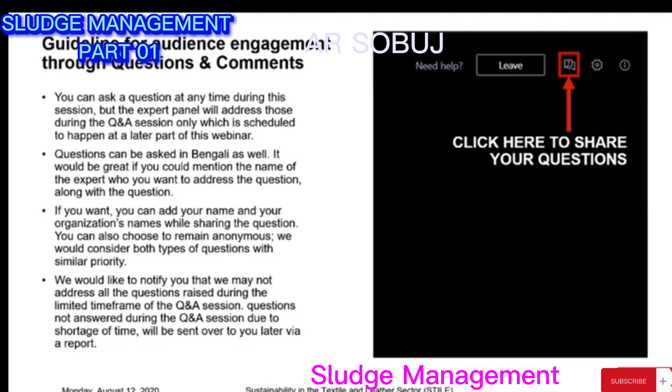I'm reminding you again, your comments and questions options are still open. With that note, let me move on. I would like to invite Dr. Emmanuel Varghese to join in and share his insights on the management and optimization of sludge and also improvements in ETP for the textile sector. Dr. Emmanuel, over to you. Thank you. Thank you, Muntasir. I am audible now. Yeah. Thank you so much, and this much encouraging participation is also a great thing. And let us move on to the presentation straight away. Next slide, please.

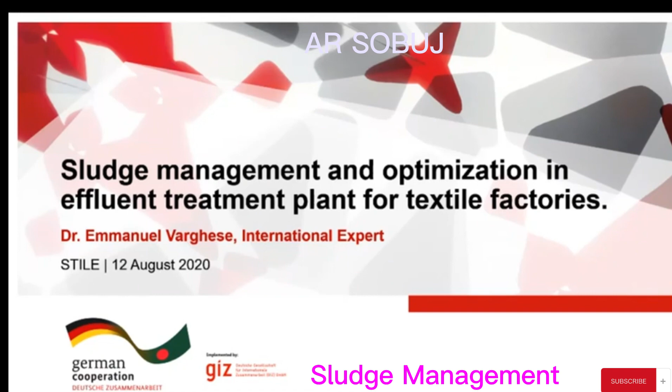Now, Dr. Abbas has presented very detailed and very deep into the source of the sludge which comes into the effluent. And he also explained very nicely what can be there and what actually should not be there, but is still there. So now let us move on to the area where the sludge is actually generated, that is ETP. When we talk about sludge management, we categorize it as 6 areas, where the first step we need to manage the sludge is sludge thickening, where the purpose is to reduce the liquid sludge volume, and there are gravity thickeners as well as mechanical thickeners for that.

And then there is sludge dewatering, how to make it into a solid material. And before we actually send it for disposal, it would be nice if we can reduce the quantity of sludge or make it more inorganic so that the quantity can be less. Also, the sludge is more inert. And the sludge disposal and utilization, often these two are combined, but the disposal is the most important part, which is actually handled by my colleague, Dr. Shoaib. So next slide, please.

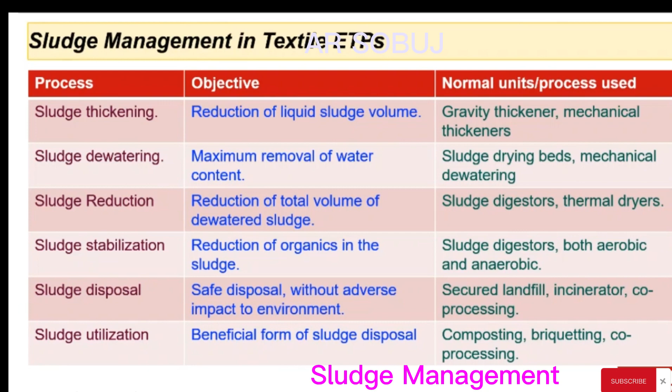So when we talk about sludge thickening, thickening is nothing but just making the sludge thick. That means it is less watery, but with more solids content. It is more useful for the biological ETPs because the biological ETP wasted sludge is actually more watery than the combined ETP with the primary treatment. Now, if you look at the common thickening process, it has gravity thickening as a normal thickener existing in ETPs, or it can be also mechanical thickening.

Gravity thickening is a plain sedimentation, whereas mechanical thickening uses equipment, like you could see in the picture on the right side. It can be a rotary drum, which has a perforated drum for separation of solids, or it can be a centrifuge, which you can see in the last picture, which uses a centrifugal action. And there are also less common but more effective mechanical thickening options like flotation, gravity belt thickening, dynamic screens, etc. Next slide, please.

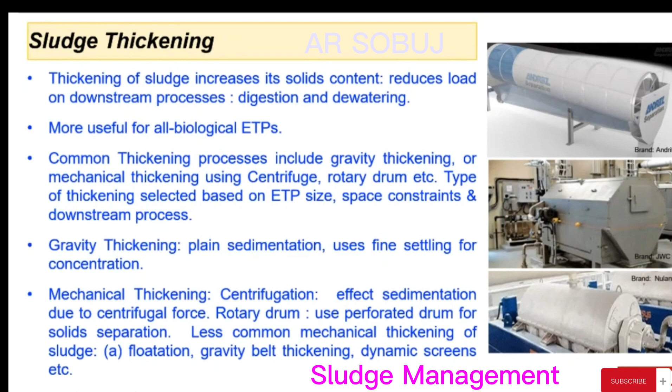Now, if you look at the gravity thickener, some of you must be familiar with it because many ETPs in Bangladesh have this unit. It is similar to a primary clarifier, except that the bottom portion of the tank is much steeper. It has more slope so that even the thick sludge can come into the center. And it has a unit called picket fence. The picket fence is like a fence, which will move around and make sure that the sludge doesn't get clogged.

The process is very simple. You know, in a normal settling tank, we keep it for something like 1 or 2 hours, or sometimes 3 hours. But that is not enough to make the settling complete.

So in the thickener, we give about 20 to 24 hours, so that the thickening will be complete and we get a very thick sludge in the bottom. The key design parameter is how much solids we are sending into the unit: surface load. For biological treatment, the surface load is normally 1 kilogram per meter square per hour, and for combined ETP it can be 2 to 2.5 kilogram per meter square per hour.

And we have to note that the thickener only increases the sludge solids percentage. It doesn't reduce the quantity of total sludge we are handling. In effect, it only makes it simpler for the subsequent sludge dewatering unit. For example, if you don't do a thickener in an ETP, all biological treatment gives you only 1% sludge. The combined ETP may give you about 3% sludge. So if you go for a dewatering unit based on this quantity, it tends to become too big.

So to make it smaller, we can always use the thickener, so that it can also make the dewatering more efficient. The disadvantage is it is less efficient compared to the mechanical thickeners, a little bit of space is needed, and sometimes there could be some smell. Normally it is not there for textile effluent, but it could also be there if you don't take out the sludge periodically. Next slide, please.

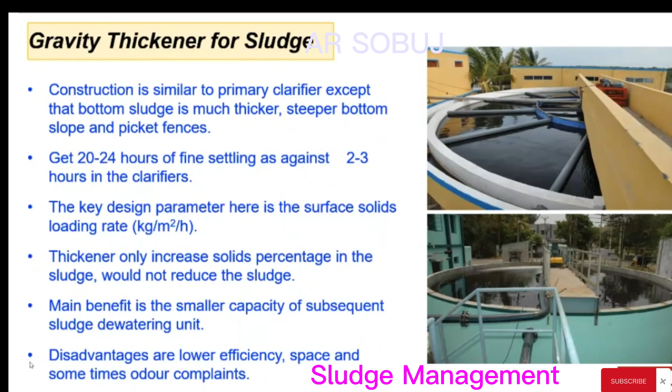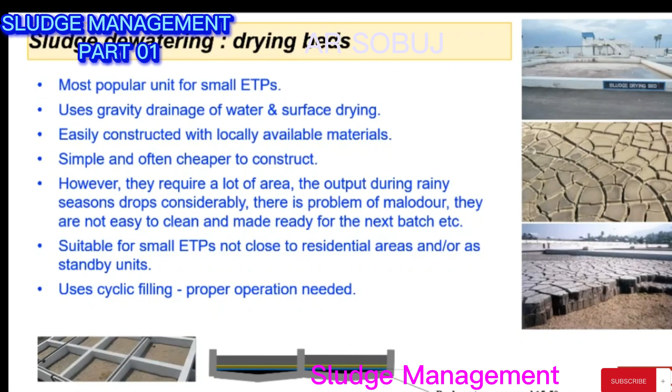Now this is a very common unit which you could see in Bangladesh. It is very popular. It is called drying beds. It is generally used for small ETPs, and it uses gravity drainage of water and surface drying. Here I would like to mention one point. Many of the ETP people think that the drying of sludge happens because of the sunshine. So they say the sunshine is not there, so that is why my sludge is not dry.

Actually, the sludge is drying in the drying bed mostly because of the filtration of water down through the filter media. In the bottom picture, you could see there are different layers of material there. The bottom portion is a drainage layer which has got a gravel, and then a smaller gravel. Then there are two grades of sand, the bigger sand and smaller sand, so that the water will percolate down. On the top of it, we can fill up to something like half a meter of sludge. And that half a meter sludge has got, let us say, 98% water.

That water will slowly percolate down, and it is coming out in the form of leachate, which we can take out. In sludge drying, 80% of the dewatering happens because of this action, and about 20% happens because of the solar drying. Now, if you look at the right side, you could see once the sludge is dry, it will crack on its own. And that is the time for us to know when we can take out the sludge.